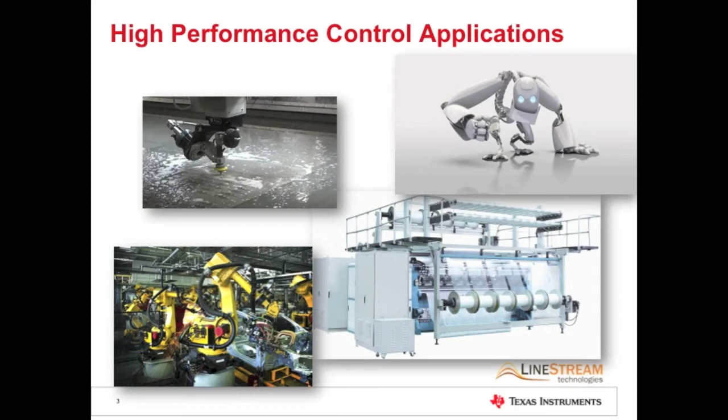Textile manufacturing, CNCs, robotics, and servo drive applications require high performance speed and position control, but the rapid pace of industry today also demands faster time to market. Where can you turn to find high performance control solutions that are easy enough to implement and a solution that allows you to bring your applications to market in less than a year? The answer is InstaSpin motion. It's called InstaSpin because you get your motor spinning and under control in a matter of minutes.

InstaSpin motion automatically identifies motor parameters, automatically tunes the current regulators, automatically identifies system inertia, and both speed and position can be tuned with a single parameter that's effective across the entire operating range. InstaSpin motion includes a software encoder so you can eliminate physical sensors and encoders when doing speed control.

InstaSpin motion can also run with a physical encoder for position control applications. This feature set is available on the Texas Instruments Piccolo chip. This chip can drive two simultaneous motors, which is a really cost-effective approach for multi-axis speed and position control applications.

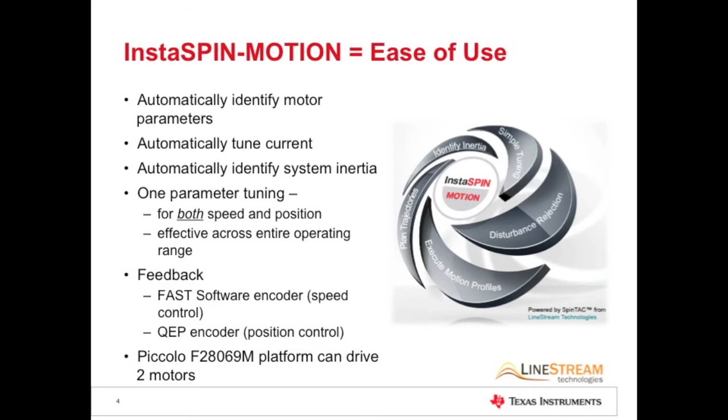InstaSpin motion has four key components. Identify measures the system inertia. Inertia is a measure of the system's resistance to change in velocity. The greater the motor inertia, the greater the torque that's needed to accelerate or decelerate the motor. The inertia estimator automatically measures system inertia by spinning the motor and measuring feedback, and we're going to see that in just a few minutes.

The second component is control. The controller estimates and compensates for system disturbance in real time. It is not a PID controller. The controller in InstaSpin motion automatically corrects for undesired system behavior caused by things like resonant mode, nonlinear friction, changing loads, and environmental changes. The InstaSpin motion controller presents better disturbance rejection and trajectory tracking performance than a PI controller, and it can tolerate a wide range of inertia change.

The controller has a single gain called bandwidth, which is used to tune both speed and position. Once you tune the controller, it works over the entire variable speed and load range of an application. This reduces complexity and system tuning time. Multivariable PID-based systems often require a dozen or more position and velocity coefficient sets to handle all possible dynamic conditions of the system.

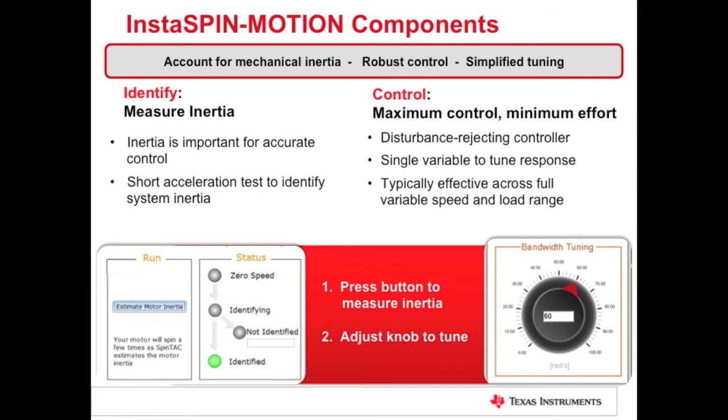The next two components help you with motion design. Move provides an easy way to smoothly transition from one speed or position to another. As opposed to predefined lookup tables, this function runs on the processor and generates curves in real time. It allows you to create smooth, configurable trajectories between 2 points. It generates a profile based on user-entered system limitations for acceleration and jerk. And then these constraints are applied to the curve type that's selected by the user. So you can select either trapezoidal, S-curve, or the ST curve, which features continuous jerk.

The final component is plan. Plan provides easy design and execution of complex motion sequences. It allows you to quickly build various states of motion and tie them together with state-based logic. The figure here displays the motion sequence for a washing machine. This complex motion sequence was easily designed using plan.

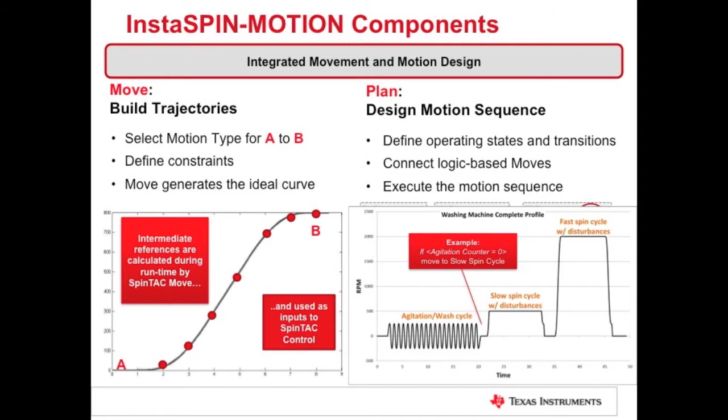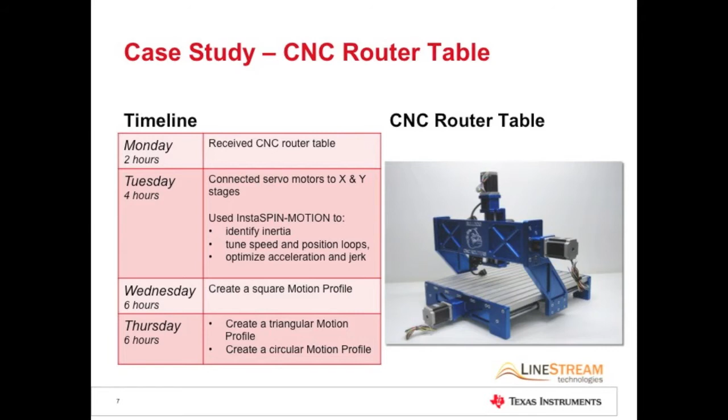Let's look at an example. LineStream applied InstaSpin motion to the X and Y axes of this CNC router table. In less than 20 hours, we set up the table, connected 2 servo motors, and we're drawing squares, triangles, and circles. Here's the completed project.

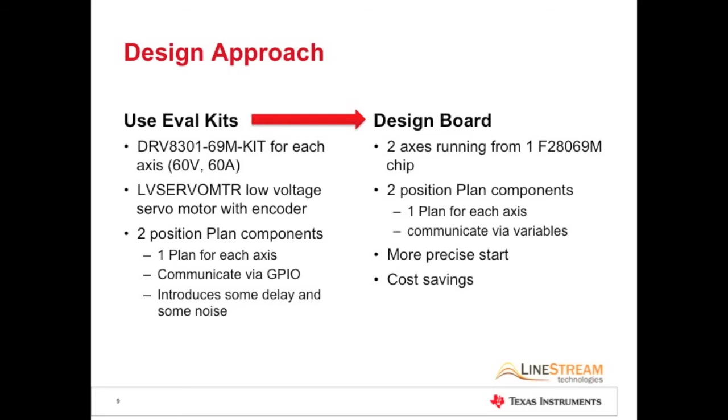When you design your own board, you can control 2 axes from a single Piccolo chip, which is really quite a cost saving. You will still run 2 plan components, but they'll communicate through variables rather than over GPIO, so this will provide you with a more precise start.

When we tell customers that they can control 2 axes with a single chip, the next question is usually about CPU utilization and bandwidth. Ultimately, you're going to need to do this calculation for your own system, so we'll walk through it together here on the webinar.

CPU utilization depends on the ISR rate and the frequency at which the position controller is called. Let's assume that our ISR is running at 15 kilohertz. The position control loop is running at 1 kilohertz. We have a maximum of 1 position control call per ISR, and there are 2 FOC calls per ISR.

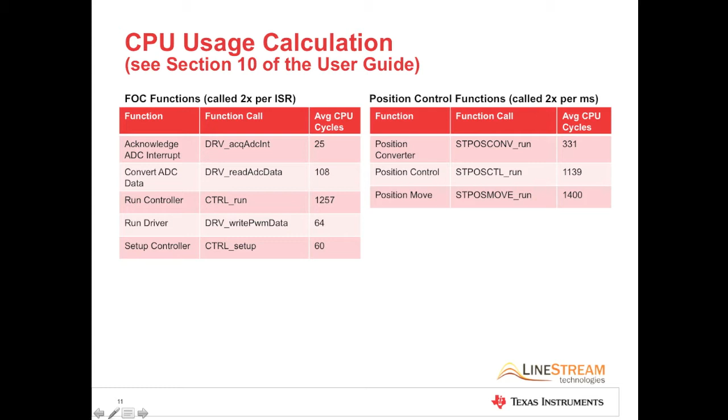There are 5 functions called as part of the FOC, and this table shows the average CPU cycles associated with each function. If we add these up, the total is 1,514 cycles.

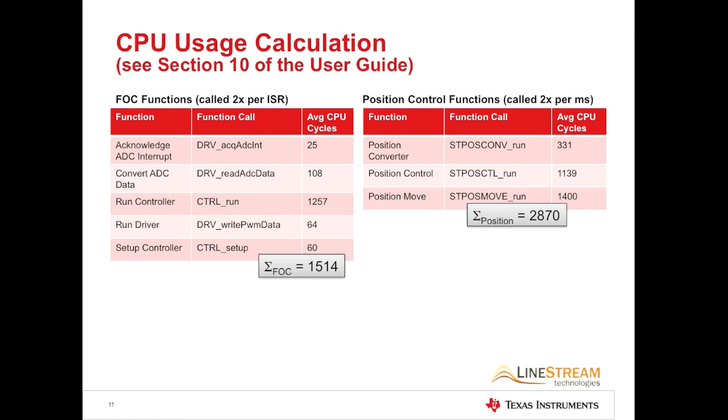Position control is called every millisecond. There are 3 functions that are called, and the sum of these functions is 2,870 cycles.

The maximum number of CPU cycles occurs when the position control is called. The CPU is executing the FOC call for each axis being controlled, as well as the position control function.

So if we solve for the equation that you see here, we find that the maximum number of CPU cycles is 5,898. For all other ISRs, the processor simply executes the FOC for each axis that's being controlled.

When the processor is not calling the position controller, it will consume 3,028 cycles.

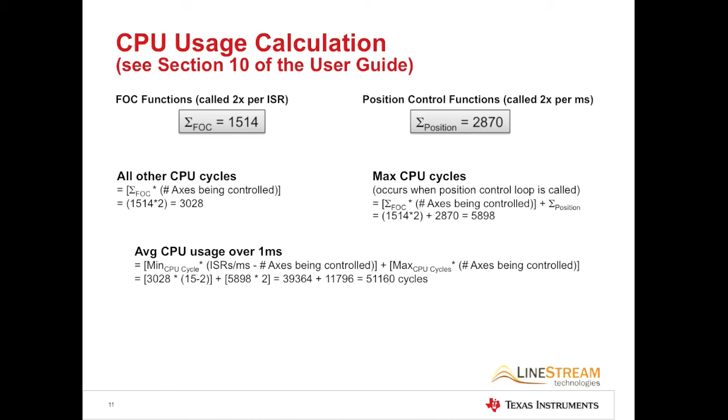Now we need to figure out the number of CPU cycles that occur within 1 millisecond. Remember that the ISR rate is 15 kilohertz. The position control function must be called twice, once for each axis. Only the FOC functions will be executed for the remaining 13 cycles.

The average CPU utilization over 1 millisecond is 51,160 cycles. So if we convert this to a percentage, in this example, we see that the CPU is about 57% utilized. You'd have 43% remaining for your own code.

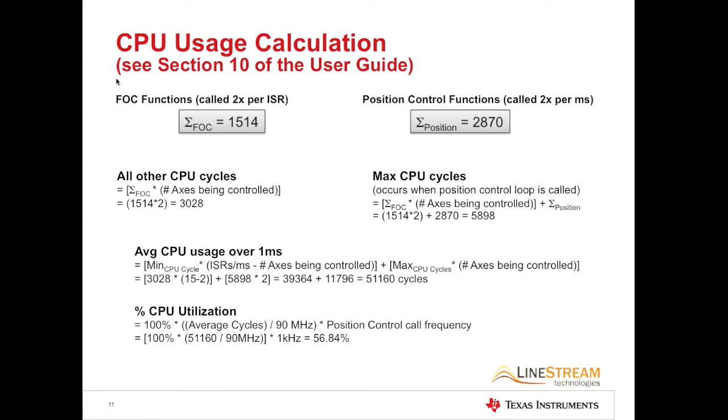I know this is a lot to go through in a webinar, so you can look up these calculations in the user guide. See section 10.

After connecting the evaluation kits and the motors to the CNC router table, we had to identify the inertia of the system. Inertia includes anything that's rigidly coupled to the motor shaft, anything that moves directly with the motor. For the CNC router table, the x-axis has a different and independent inertia than the y-axis.

To identify the inertia of the CNC router table, we set each stage so that it had the entire range of positive motion. The inertia ID always rotates the motor in the positive direction.

We then modified the InstaSpin Motion motorware labs to run with the sensor. By the way, we're going to include this code in the next version of motorware, so be on the lookout.

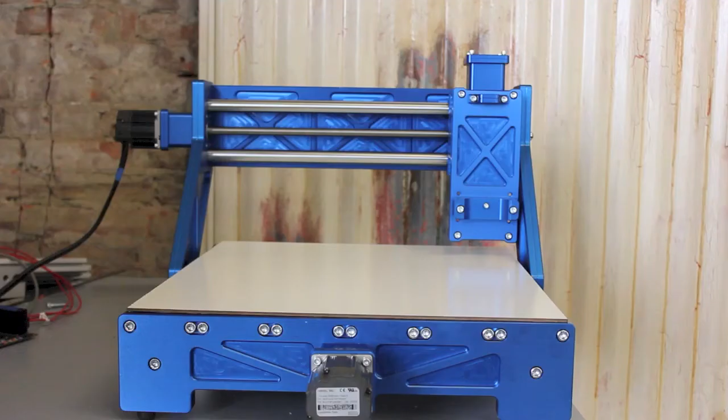Let's watch a quick video to show the inertia identification process for the y-axis. Now watch closely because this happens very, very quickly.

As you can see, it was very quick, and in just that quick moment, the y-axis inertia was identified. Let's watch that again, just in case you missed it the first time. Here we see the arm moving just a little bit, and after that, the inertia is identified.

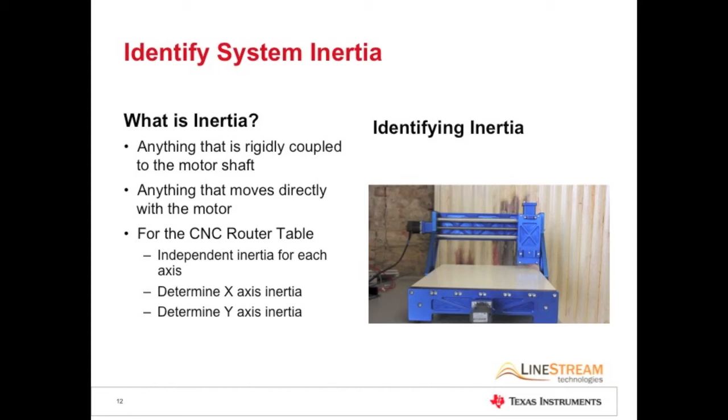The inertia value is an input to the controller. Now the controller knows how much torque is required to get the application moving.

Sometimes we run into situations where the system inertia changes over time. This is the case with many applications in the industrial space, such as robotic arms and industrial winders.

This diagram compares the performance of the controller with a range of incorrect inertia settings. This was tested by applying a torque disturbance to a motor system. The inertia value provided to the controller was set to different values to highlight the range of inertia error that can be tolerated by the controller.

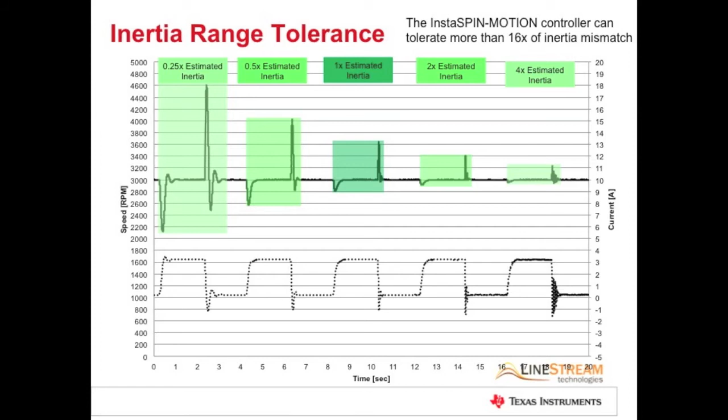This graph shows that the controller can tolerate an inertia mismatch of more than 16 times. The best performance is realized when the inertia value matches the application, but if the inertia of the system changes, the controller will remain stable.

Now it's time to tune the controller. Speed and position are tuned at the same time using a single gain called bandwidth. Each axis is tuned independently. The tuning process is pretty simple and straightforward: we adjust the bandwidth, we inject a disturbance, and then we see how well the axis holds its position.

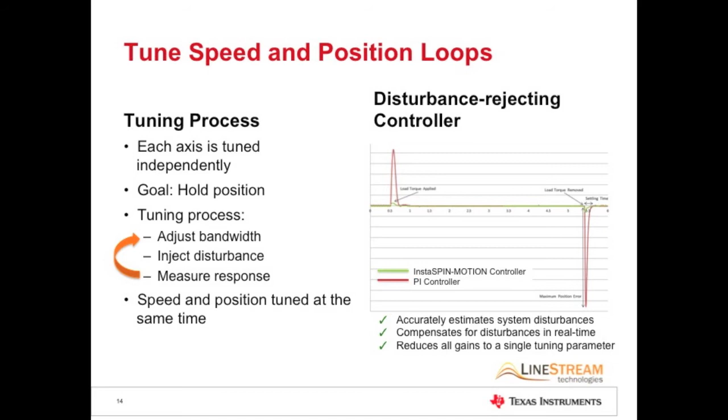The InstaSpin Motion controller is not a PI controller. InstaSpin Motion's controller accurately estimates system disturbances and compensates for them in real time. As a result, this controller typically performs better than PI control across the entire operating range of the application with just a single gain.

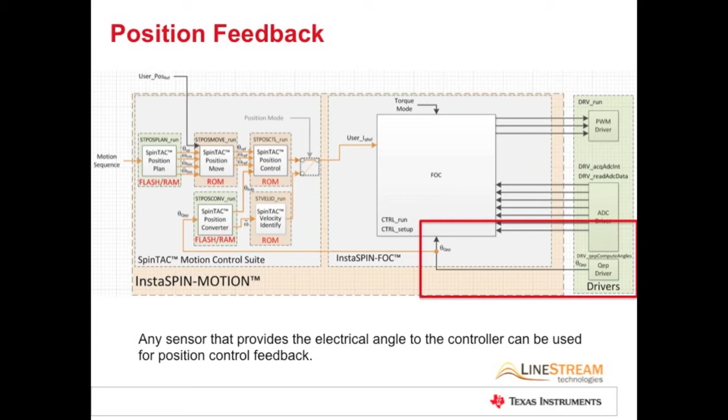In the MotorWare labs, a quadrature encoder is used to generate the electrical angle, but any sensor that provides the electrical angle to the controller can be used for position control feedback. So we just wanted to point that out to you. In our situation with the CNC router table, we did use a quadrature encoder that was connected to the motor.

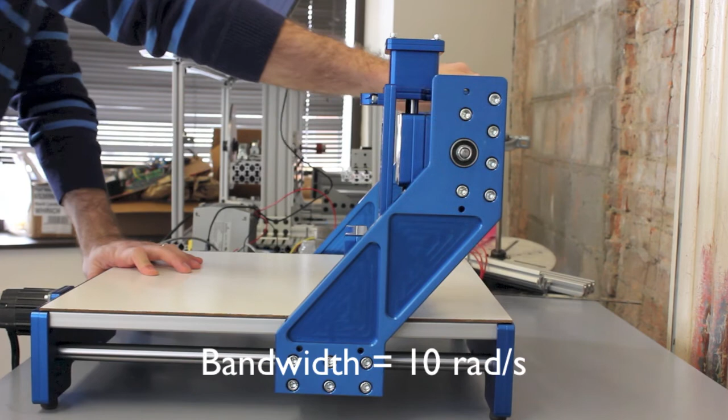So here's how we tuned the bandwidth for the x-axis. We set the initial bandwidth to 10 radians per second and then manually injected a disturbance. Notice that the arm moves pretty easily at this setting. As we increase the bandwidth, it becomes more difficult to move the axis. At 40 radians per second, the router table's x-axis is holding the position really, really well.

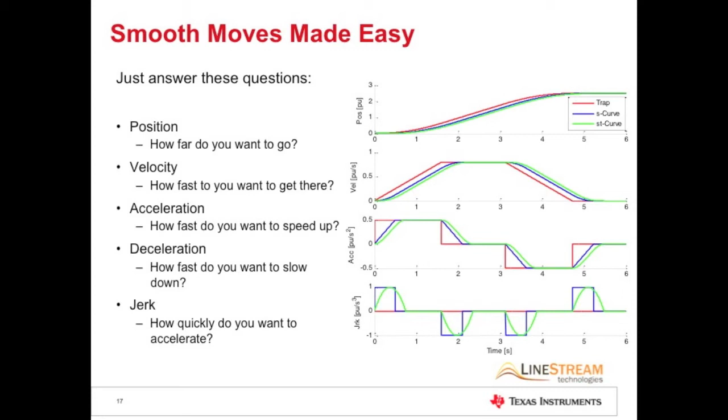Once the X and Y controllers are tuned, we've got to find a way to transition from one speed or position to the next. InstaSpin Motion's move component is a motion engine. It allows you to enter the acceleration and jerk, and then it automatically generates the best trajectory to satisfy your user-entered constraints. These constraints are applied to the curve type that you select. You can select either trapezoidal, S-curve, or the ST curve featuring continuous jerk.

For the router table, we wanted to optimize acceleration and jerk. So how do we arrive at the optimal values? Well, we focused on acceleration first. We selected the trapezoidal curve because it doesn't take jerk into consideration. We then commanded each axis to move back and forth while slowly increasing the acceleration. We knew that we had reached the optimal acceleration when the motor failed to reach the commanded value.

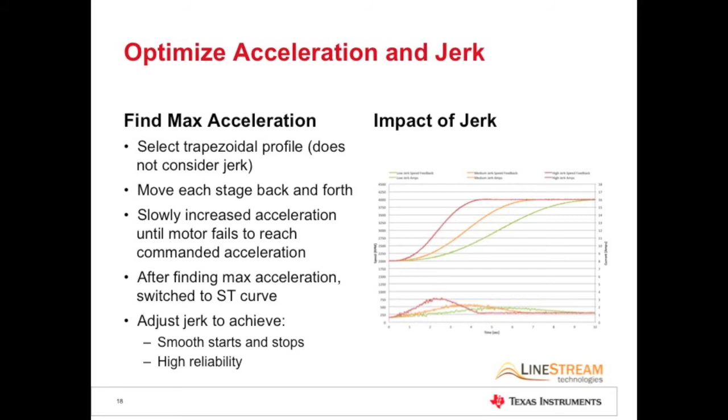Once we had the optimal acceleration, we then optimized the jerk. For this, we switched from a trapezoidal curve to the ST curve, which features continuous jerk. We adjusted the jerk so that the router exhibited smooth starts and stops with a very high degree of reliability. Another interesting thing about the ST curve trajectory is that it consumes less power, which is shown in the graph here. Power consumption increases as the system jerk increases.

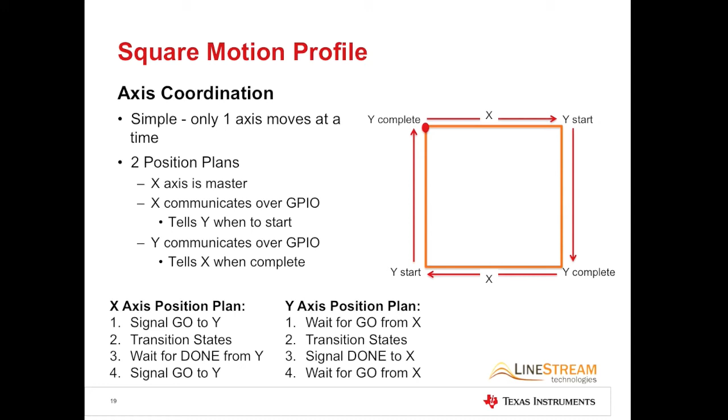Once we had our controller tuned and we had defined our motion, we had optimized acceleration and jerk, we then started creating shapes. The first shape that we drew was a square because it's the simplest. Only one axis moves at a time. In this situation, we established two position plans, one for the x-axis and one for the y-axis. The x-axis was the master, so x signaled to y when to start the move, and y told x when the move was complete.

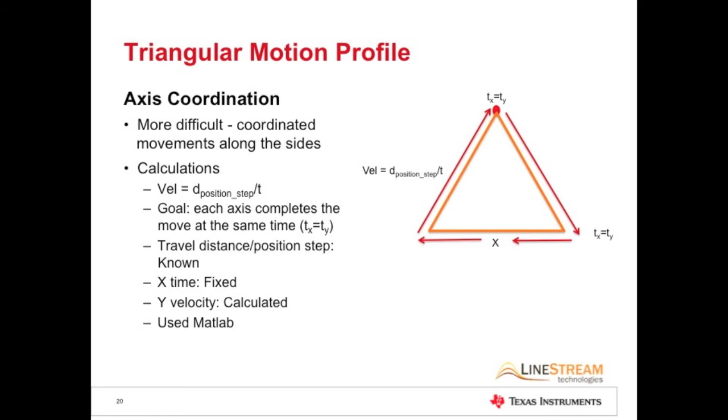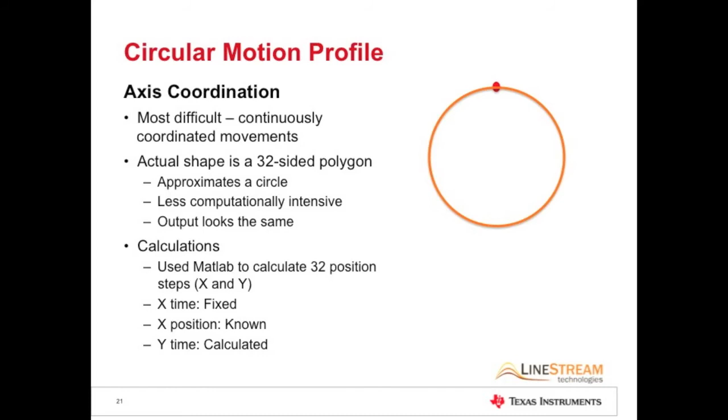The circular motion profile is absolutely the most difficult. We cheated a little bit on this one. The actual shape is a 32-sided polygon, which approximates a circle but is less computationally intensive. We used MATLAB to calculate the x and y positions, and from there we were able to calculate the time for the y-axis.

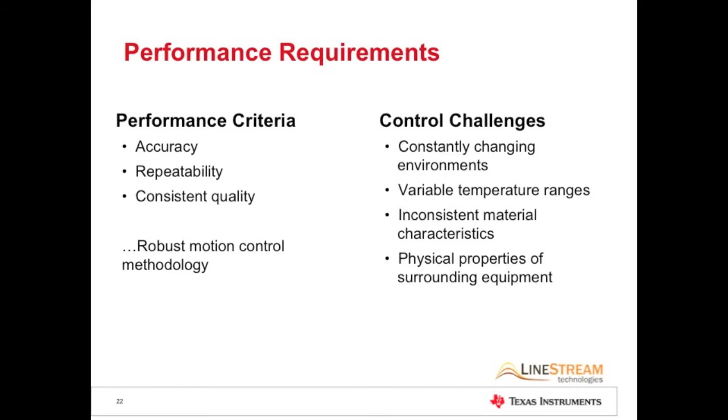We've seen that it's really simple to achieve multi-axis speed and position control, but we also have to be concerned with performance. There's an increasing need for accuracy, repeatability, and consistent quality in these applications. PI control is even more challenging because these applications operate in environments that are constantly changing and can be quite unpredictable. In industry, varying temperature ranges, material characteristics, and physical properties of the surrounding equipment must all be understood and accounted for in order for PI to be effective in controlling motion.

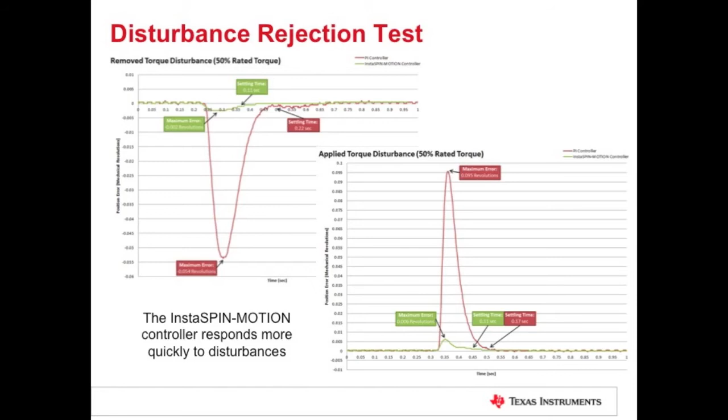InstaSpin motion overcomes these challenges. These graphs compare the performance of InstaSpin motion to a PI controller. A dynamometer was used to inject a torque disturbance. The maximum error is smaller, and the settling time is much shorter for InstaSpin motion.

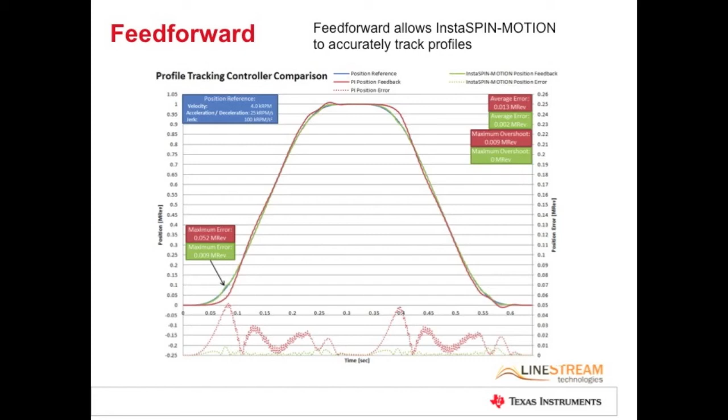This graph shows a profile tracking comparison for one motor revolution. Again, we see that InstaSpin motion had less overshoot, lower error, and better profile tracking than a PI.

So in summary, motor control can be a difficult thing to master for any designer. InstaSpin motion simplifies and speeds up both motor control development and motion control. InstaSpin motion optimizes motor efficiency, performance, and reliability. InstaSpin motion is available now, and the evaluation tools you saw in this webinar are available now. But be on the lookout—more platforms and tools are coming in 2014.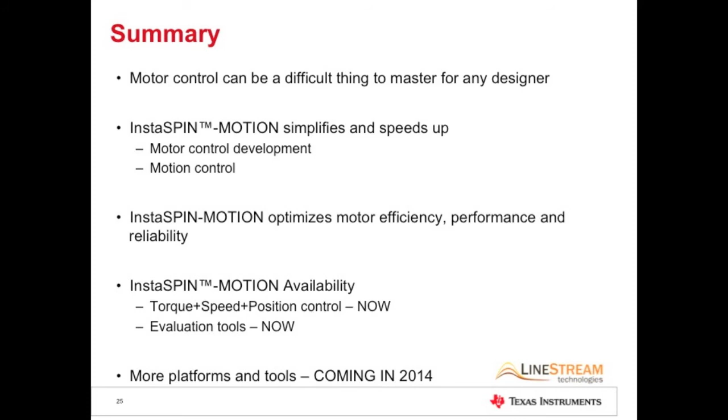Absolutely. And just to kind of start things off, we do get some frequent questions. One of the common questions we get is about identifying inertia. So we mentioned that InstaSpin motion will automatically measure or identify your motor parameters.

When you do this particular step, the motor is not connected to any load—it's disconnected from any inertia. Now, when you do the inertia identification, you're going to want to make sure your motor is connected to anything that constitutes the inertia. Inertia is anything that spins with the motor during operation. It's important for us to do this so that the controller knows the torque needed to overcome that resistance to rotation.

That's right. So a great example of that is a washing machine. There are a couple different components connected together—there's a drum that the clothes and water get placed into. What we would consider inertia in that situation would be the drum itself, but the clothes and the water would not be inertia. Because if you rapidly change directions on the drum of the washing machine, the drum rapidly changes direction with you, but the clothes and water have that delay—they don't immediately change directions.